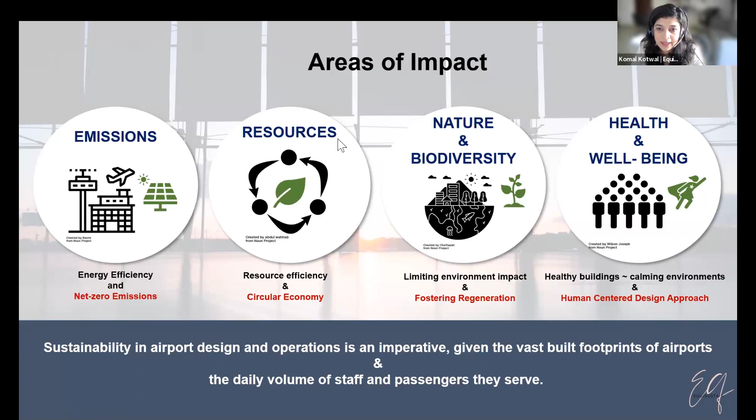So moving on to the next slide, I'll go through each of these topics briefly, starting off with energy efficiency and emissions. I think the most important thing in airport design when you're starting off is to understand what are your biggest sources of energy consumption at the beginning of design. That may change based on location, based on greenfield versus brownfield, based on where in the world the airport is.

But in this example that I've shown over here, what we did was create an early energy analysis of the project, and we understood that the most energy consuming parts in this airport design were going to be the space cooling and the baggage handling process that take up about 34% of the energy. You don't think about baggage handling as an energy consumption source, but look how high it is right there with space cooling. And this is for an analysis we ran in a hot and humid climate such as Mumbai or different parts of the country.

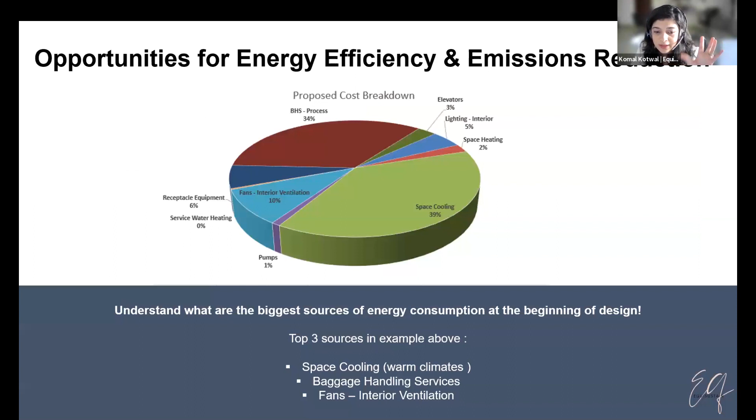So now that we know what the sources of energy consumption are, what are the strategies that you can use? The one thing we don't want to do is just say we're going to put on renewable energy and call it a day, right? We want to address this holistically. So thinking about the various strategies for incorporating energy efficiency and thereby reducing emissions, getting to net zero carbon.

The first one as architects is how you site the building, how you orient the building. That's not always an easy option when it comes to airport design. So you have to think about what you can do from your building enclosure perspective. The airport on the right, I had a chance to be one of the sustainable design specialists for the LaGuardia Airport Terminal B, which opened a couple of years ago. And we studied various glazing options to help us understand which one is going to give us the most energy efficient approach.

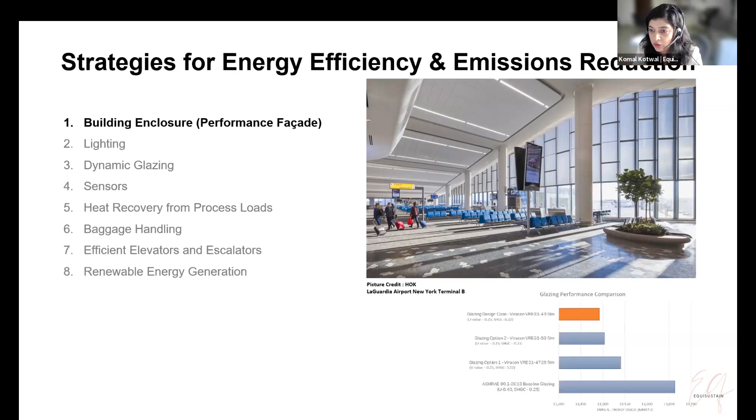The second strategy, which is a big one in airports, is lighting. Using energy efficient sources of lighting, incorporating as much daylight as possible, and having automated systems which allow the natural light to be used and turn off the artificial lighting during the daytime is a great way to do it. This picture you can see over here is the Doha airport, the Hamad International Airport, where they've allowed a lot of natural light to flood that area.

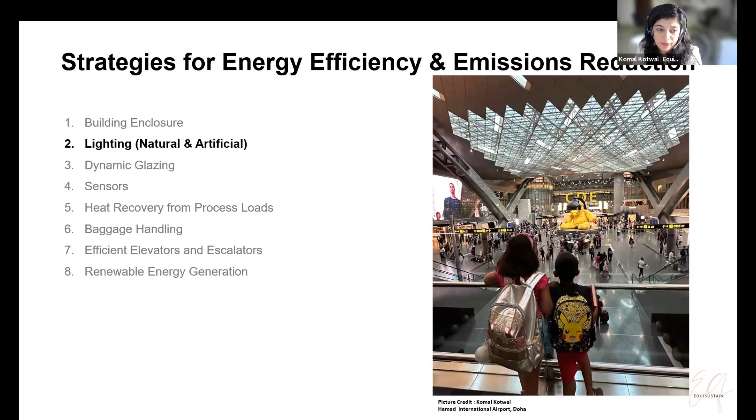Dynamic glazing systems are gaining a lot of traction. This is at Minneapolis airport, but also airports such as Dallas Fort Worth have adopted a mandate of completely using dynamic glazing.

What does dynamic glazing mean? It is essentially glazing or glass which changes as the day changes. So it becomes darker if the sun is shining bright. That helps people who are inside avoid glare, but it also makes the building more energy efficient. So the less glare coming in, the less energy the building uses.

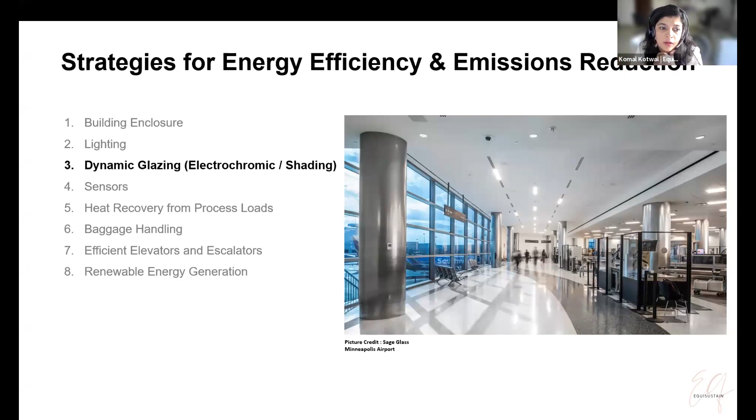A huge part of energy efficiency strategy in airports is sensors. Airports are complex. So there's building management systems, occupancy controls. How can all of this be looked at in a strategic way to make sure that you can get to efficient operations in the buildings? As designers and architects and engineers, I think something to recognize here is the role of commissioning in an airport system. That's why it's very important right from the design phases to have that.

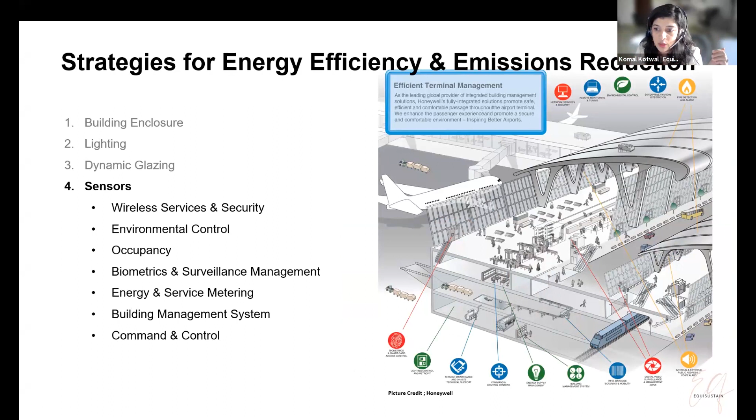Heat recovery from process loads, imagine how much heat comes out. This is a very strong strategy. A lot of building energy codes the world over are actually requiring this to happen. For example, this airport that you see over here is Niagara Falls International Airport. What they've done is the heat recovery system takes energy from the baggage scanning machines and distributes it throughout the terminal to keep travelers comfortable in a cold climate.

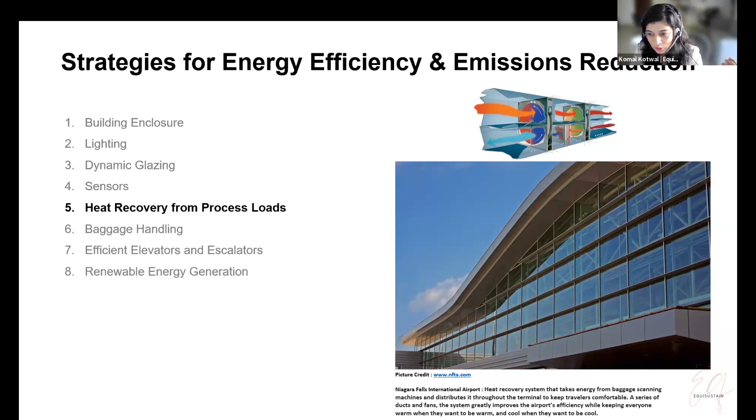A series of ducts and fans greatly improve the airport's efficiency while keeping everyone warm when they want to be warm and cool when they want to be cool. So thinking of what's the right heat recovery solution.

And I think I mentioned this earlier, high efficiency baggage handling system. When I told Akanksha, I'll not just include opportunities, I'll also include challenges. This has been a challenge on some of the airports we've designed. If you don't think of baggage handling right from the beginning of airport design, the cost can be an issue. So efficient baggage systems are very critical to operational efficiency later, but also for the first cost as well.

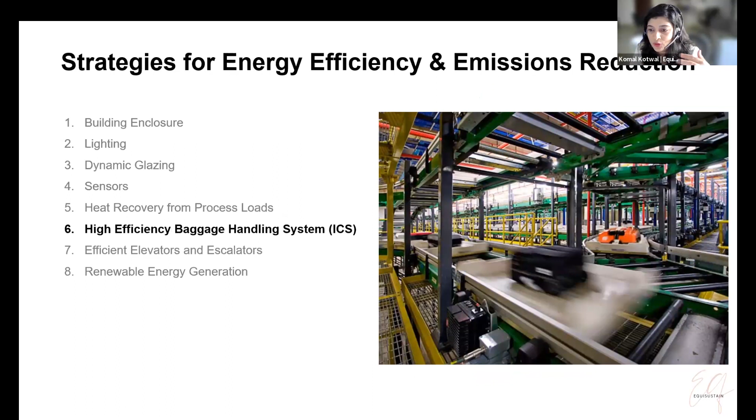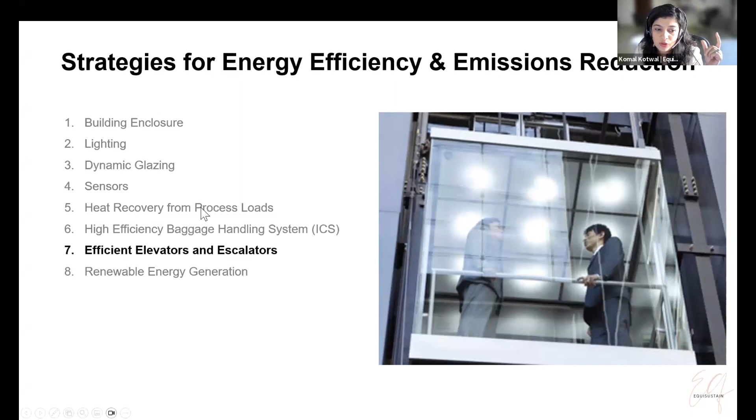And efficient elevators and escalators, I think this is what we call the low-hanging fruit. You have to do this to gain as much energy efficiency. And last but not least, the way I like to approach it is, once you have reduced the amount of energy that an airport design would need, that's when you think about what is the right renewable energy approach. Airports have vast footprints. I think all of us have already said that.

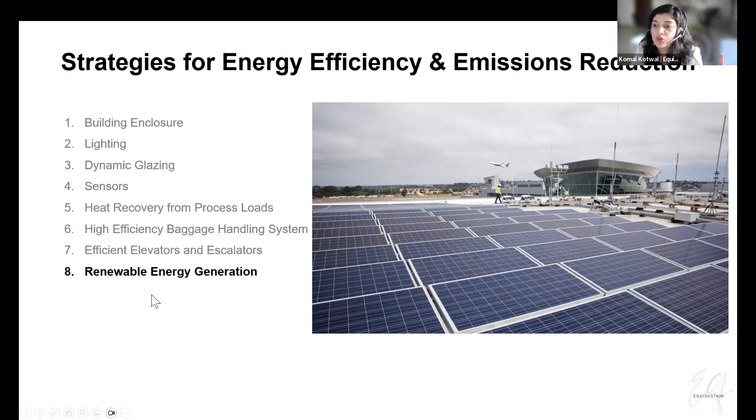But think about how much space they have available, especially in a climate like ours where this is a great resource. So utilizing solar energy. But if you're improving energy efficiency to begin with, you need less solar power, right? So that is why all of these first top 7 points are extremely important to recognize as well.

Moving on, we talked about energy efficiency. If you remember one of my first slides, I talked about resource efficiency. So what are some of the strategies that we're actively seeing and incorporating for making airports sustainable as buildings themselves, right? Thinking about the building materials, low carbon materials, they are really gaining traction.

Sometimes it's as extreme as this airport, a recent competition won by BIG and HOK together for the Swiss airport, where it's a whole mass timber project. You can go as extreme on low carbon, or think of material selections for the interiors that can reduce carbon, maximizing materials with recycled content, and using local materials, where you do not need to ship them from all over the world.

Even reusing materials or elements like art is a great way to showcase some of that within airports, maximizing the use of natural materials, minimizing synthetic finishes, and really using low emitting materials which are healthy for occupants as well, in addition to the environment.

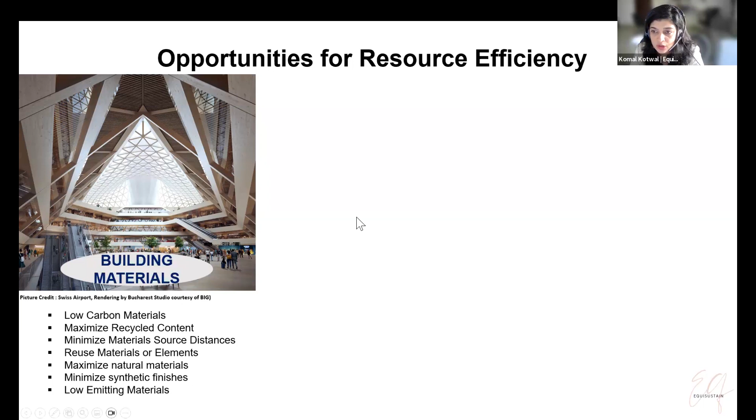I think water use is one area that tends to be ignored when we talk about airport design, a little more than it should be. Water efficient fixtures are a great way to save. We have been working on a couple of airports recently where low flow fixtures have become the design standard at large airport systems, and they're saving 30 to 40% of water compared to what they would have used without low flow fixtures. Gray water reuse, though, is hard for flushing; in some cases it's still an option for irrigation. So looking at that as an alternative.

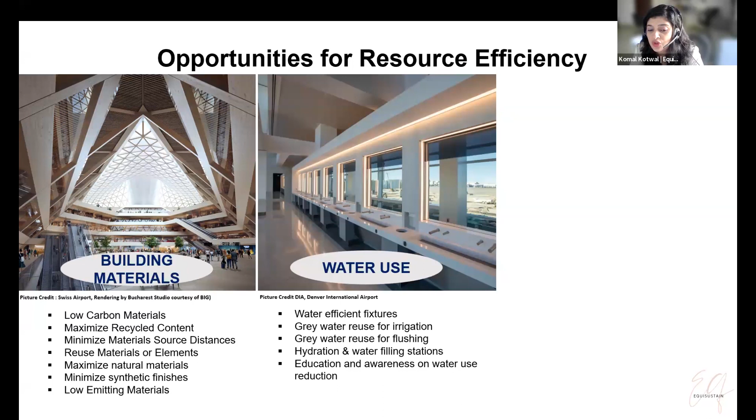Hydration and water filling stations serve the purpose of first encouraging people to drink more water instead of other unhealthy drinks and juices and cokes, but it also reduces plastic. So it is a simple strategy that can be incorporated. And then lastly, using signage as a means of education and awareness on water use reduction throughout.

The last area for resource efficiency, and I think this is one area that definitely needs everyone's participation, not just design and construction, but also operations as well as the people, the staff, all the travelers. Having a construction waste management plan when you design an airport, by contractors, and putting that in the specifications by architects is important.

Operational waste management plans are critical, because if you don't have a strategy on how you are going to compost, how you are going to recycle, it's all just going to go to the landfill. And again, an important part of this is education and awareness on waste reduction as well.

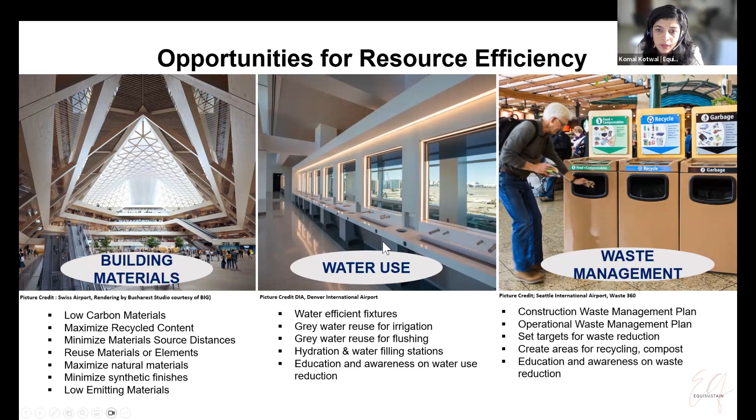And then this is by far my most favorite part. How can airport design really have a human-centered design approach? So I think I mentioned this earlier, and some of the images that you showed, Srilata, also speak to this, but airport design can really play a role in reducing the stress associated with air travel. They are important to create calming environments. You see these lines and lines, like how many people are stressed by just the lines, right?

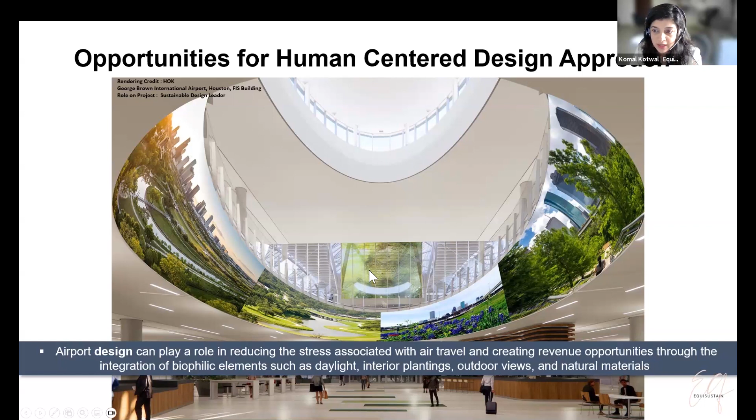But having these surroundings that generate a feeling of calm, either by daylight or interior plantings or outdoor views or natural materials, this is straight in the hands of us as designers and architects and engineers to give the travelers that experience. So what are the strategies for a human-centered design approach? One is integrating biophilic natural elements in design.

Everybody is very sensitive to their surroundings. All of us, somebody sneezes around us and then we tend to go away, right? So how can we use materials that help with that? How can we as architects and engineers use filtration systems and building systems? But lastly, we're also seeing a lot of airports adopting this real-time air quality monitoring.

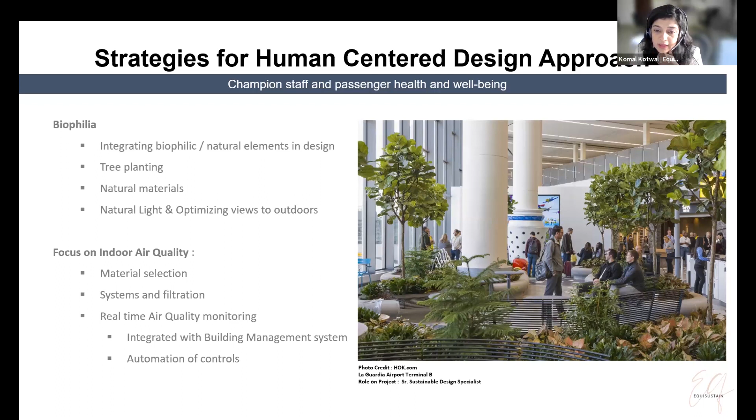So essentially, someone on the staff side sees it integrated with the building management system. If the air quality is going down, if the carbon dioxide is rising, what is happening and how can that be acted on to ensure good air quality in an airport? Then the third part about human-centered design is the focus on acoustic, sound and thermal performance.

There were a lot of studies done, and one of the things that came out is that the part people are most sensitive to is the noise. And you can imagine how much noise there is in airport environments. So creating areas where the interior assemblies, walls, and surfaces have that quality to ensure acoustic performance. We're also doing zoning and mapping to really create those environments that are not loud, that make people feel comfortable.

And the second part here is occupant engagement to promote health and well-being. We are seeing a lot of airports around the world using these environmental graphics, where, for example, you have those walkways encouraging people to actually walk versus the moving walkways, and that encourages a healthy lifestyle. Small things that you can do with environmental graphics, but also inclusive designated wellness areas.

Just because somebody has access to a lounge and they can relax, that does not make everybody's travel comfortable. So creating these mindful spaces or interactive spaces that are accessible to all is a trend, or a future aspect that we're seeing more and more. And then staff training and education to promote health and well-being. Airport staff works around the clock. What are airport designers providing to help them also create these spaces of comfort?

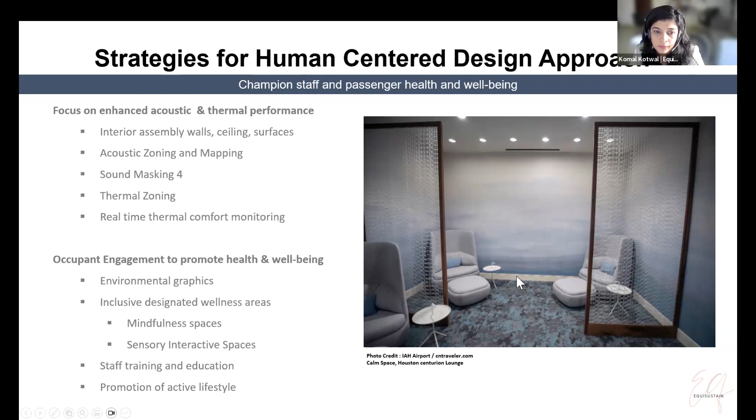I have been asked this question. There are so many certifications in the sustainability world. What is the one that you would recommend for airports? And it is Envision. It is a framework that really allows for holistic sustainability. It's a rating system that guides different types of infrastructure projects, including airports. We're seeing more and more airports adopt this.

It focuses on pretty much everything that I just talked about, like emissions from bottom to top, natural world, how do you protect the ecology that you are in, where are you siting the airports, resource allocation, so what materials you're using, how much water you're saving. I think Srilata showed us the slide with the number of stakeholders that are there in airports. So that is an important part of sustainability. Like, are you collaborating, planning, is every voice being heard or not?

And then lastly, again, well-being and mobility, like how are people getting to the airport, for example. So all of these are addressed in this Envision framework, and I'm happy to provide more information if anyone would like later on. But that's a great place to start if you're looking for where to incorporate sustainability.

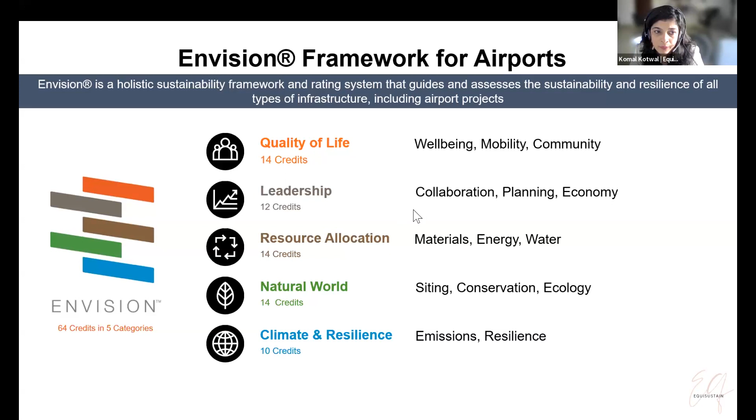And I like to leave everyone with this slide, which is kind of a vision of positiveness and abundance, right? I'm sure everyone's seen this beautiful new Changi terminal. And when we talk about sustainability, it's always about minimizing and reducing and saving. It's about taking away. But we need to look at a future where our designs and our projects actually give more, right? So this is an image which makes you feel like we're enhancing habitat, we're creating resources, we're harvesting energy, we're engaging the community.

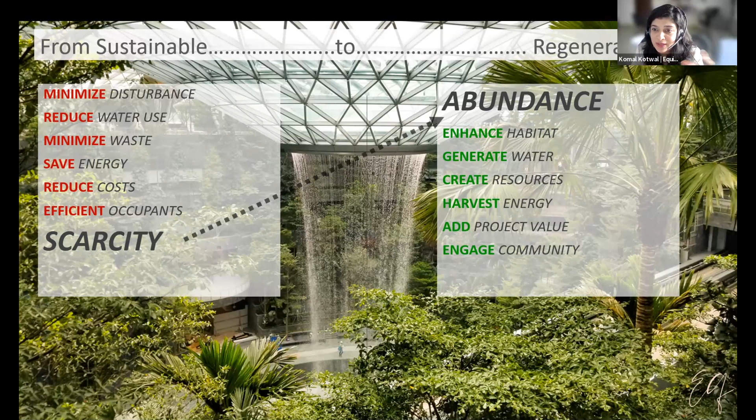So I think given how big a role airports play in our daily lives, there's a great opportunity for them to become the symbols of going from sustainable to regenerative. Thank you, Komal. That was indeed an intriguing submission on elevating sustainability in airport designs and operations.